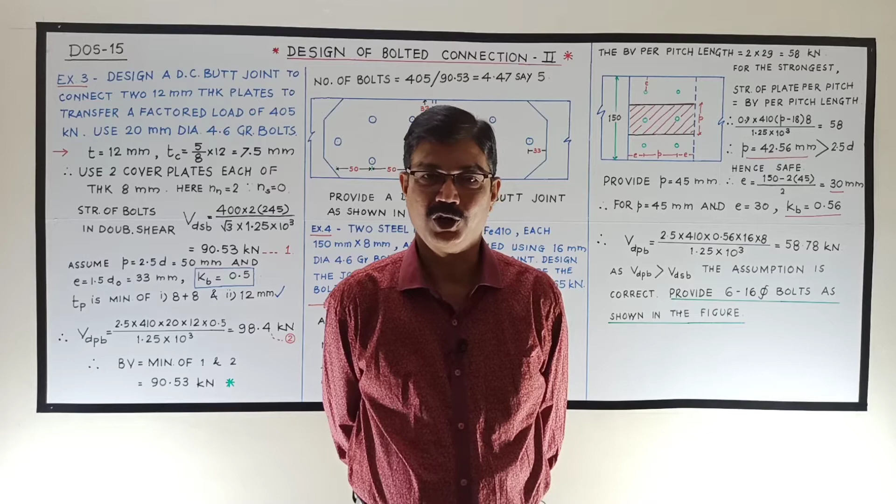Design a double cover butt joint to connect two 12 mm thick plates to transfer a factored load of 405 kilonewton. Use 20 mm diameter 4.6 grade bolts.

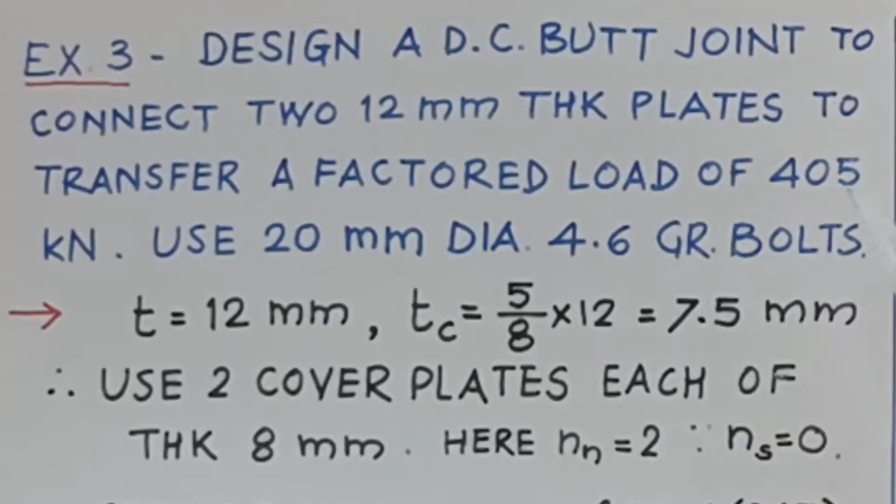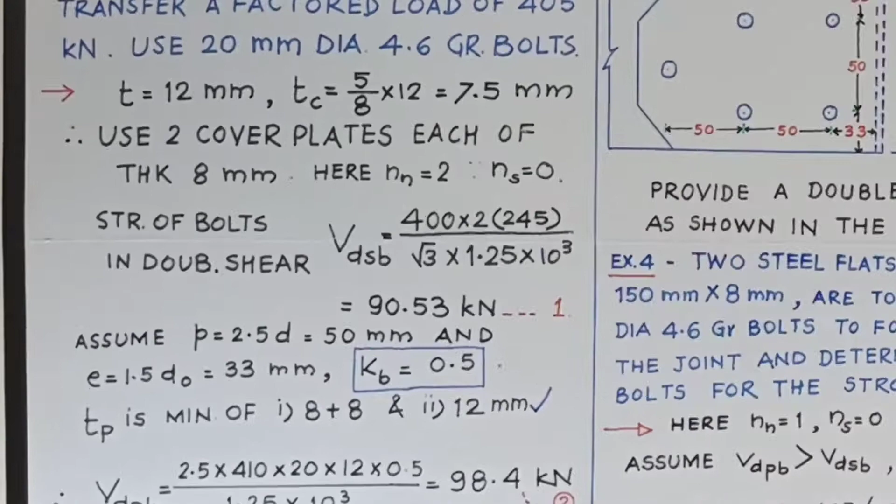Problem number 1 and 2 were of lap joint. This problem is of a double cover butt joint. What is given? The thickness of plates is given as 12 mm.

Now thickness of cover plate is not given. How is thickness of cover plate calculated? Generally, total thickness of cover plate is 1.25 times the thickness of main plate. So the thickness of one cover plate will be 0.625 times the thickness of main plate, that is 5 by 8 times 12, that is 7.5 mm.

But 7.5 mm thick plates are not available. Therefore, we will use two cover plates, each of thickness 8 mm.

Now in this case, it is a double cover butt joint, therefore the bolts will be subjected to double shear. Therefore, Nn plus Ns is equal to 2. As usual, nothing is specifically mentioned regarding the shear planes, so we will take Ns equal to 0. Therefore, Nn is equal to 2.

Now, let us calculate the strength of bolts in double shear, that is VDSB, as usual FUB upon root 3 into Nn into ANB upon gamma MB.

Let us assume that pitch is 2.5 D, D is 20, so it is 50 mm, and E is 1.5 D0. As diameter is 20, D0 is 22, so 22 into 1.5 is 33 mm.

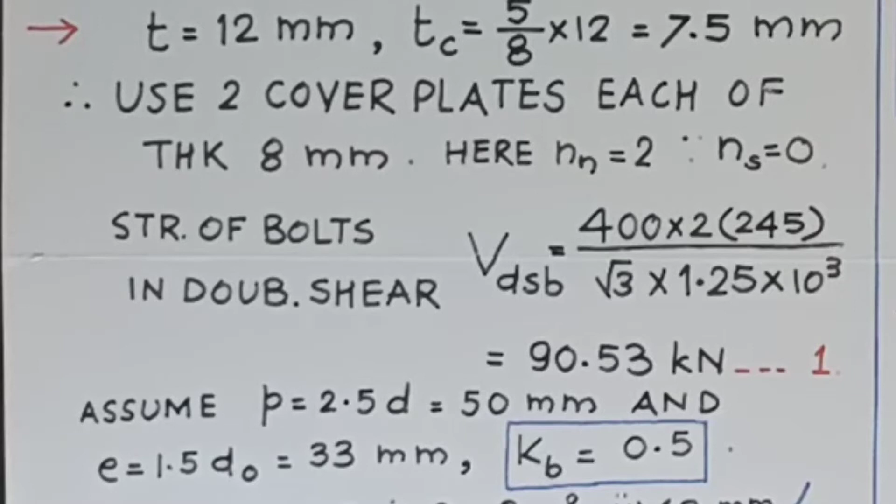As usual, calculate KB. KB is the minimum of: first, E upon 3 times D0; second, P upon 3 times D0 minus 0.25; third, FUB upon FU; and fourth, 1. Out of all those, the minimum value is 0.5, so KB is equal to 0.5.

Now for calculating VDPB, that is design bearing strength of bolt, we will require the thickness of plate, that is TP. Here two cover plates are there, their total thickness is 8 and 8, and the main plate is 12 mm. So 8 plus 8 and 12 mm, minimum of these is 12 mm. Therefore, TP will be taken as 12 mm.

VDPB is calculated as usual: 2.5 into FU into D into TP into KB upon gamma MB, into 10 raised to 3 for conversion into kilonewton. This comes out to be 98.4 kilonewton. Let us say that this is second one.

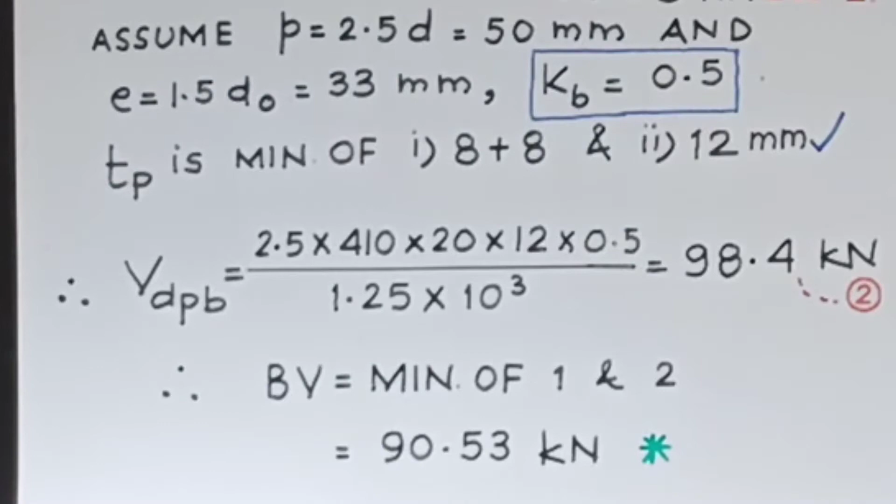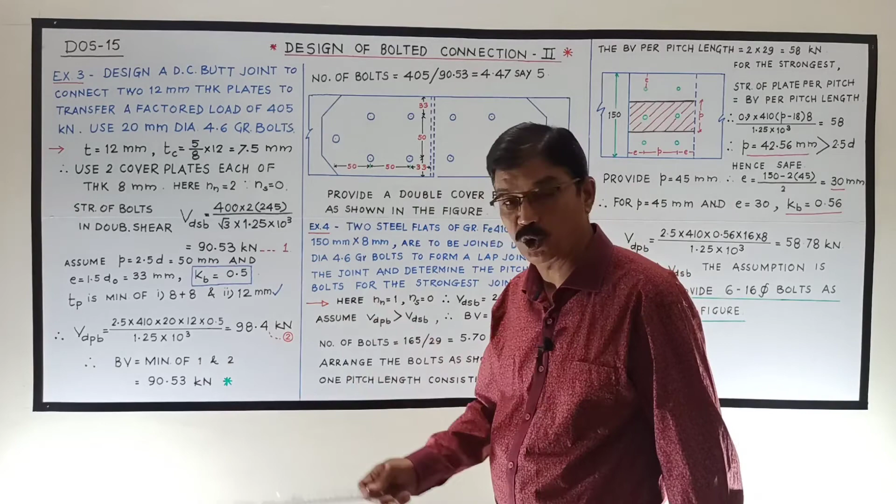Now bolt value definitely will be minimum of strength in shearing and strength in bearing. Therefore it is minimum of 1 and 2. Therefore, bolt value is 90.53 kilonewton. Do you understand this?

Now, once we calculate the bolt value, we can find out the number of bolts required. Number of bolts required is equal to factored load to be carried divided by bolt value, that is 405 upon 90.53, which comes out to be 4.47, say 5.

Now, how to provide 5 bolts? Provide a double cover butt joint as shown in the figure. So these are 5 bolts, 1, 2, 3, 4, 5th.

We have already taken value of P as 50 mm, value of E as 33 mm, and we have already assessed that bearing strength is greater than shearing strength, so there is no question of assumption. So these 5 bolts are shown like this.

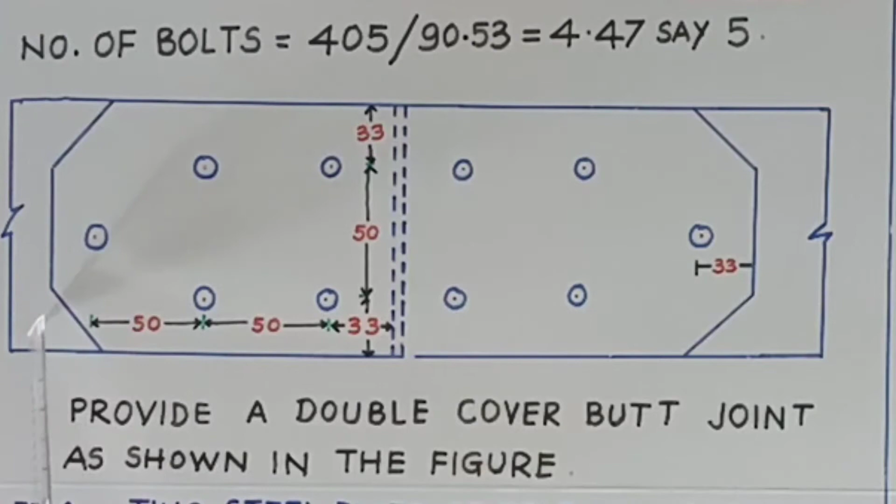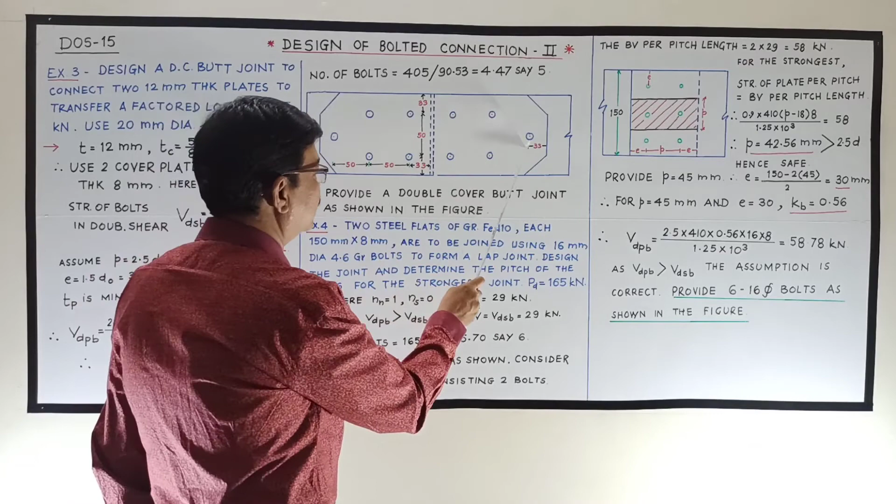This is one plate, this is another plate, this is cover plate, this is main plate, this is cover plate, main plate. This is pitch 50 mm, pitch 50 mm, this is edge distance, this is edge distance, this is end distance. So this is how it is necessary to draw the figure when you are designing a particular joint.

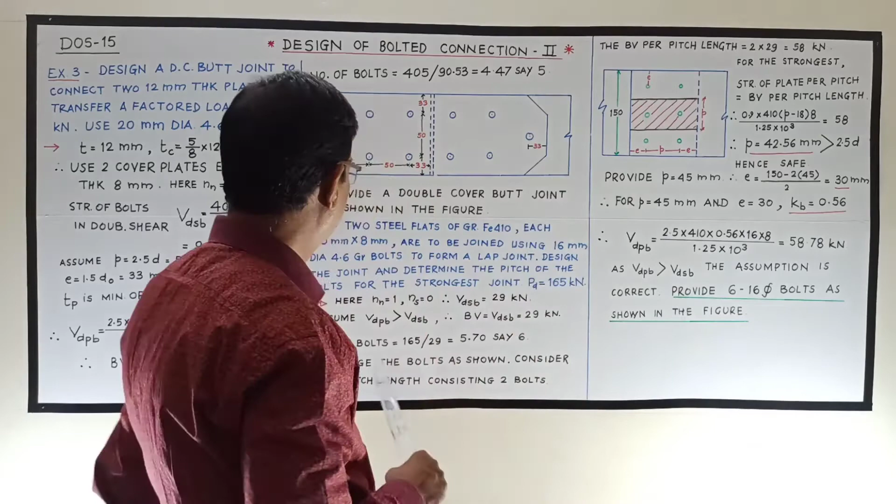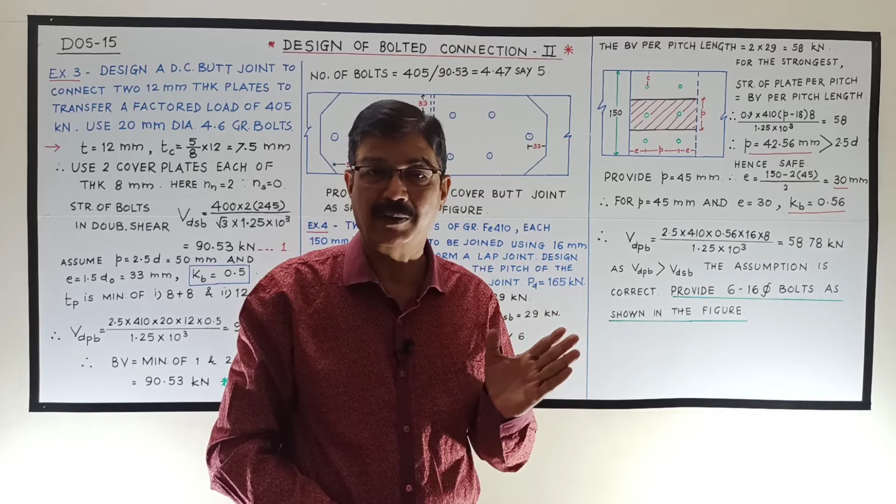So this is one problem of double cover butt joint. Let us solve one more problem of design. In this problem, we have to find out the pitch so that the strength of that joint and strength of the plate will be same, that is the joint will be strongest. So let us see how to proceed.

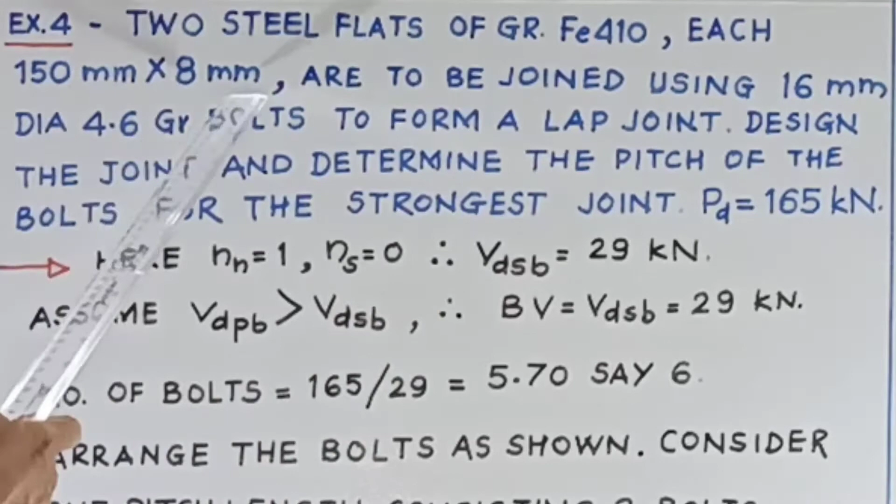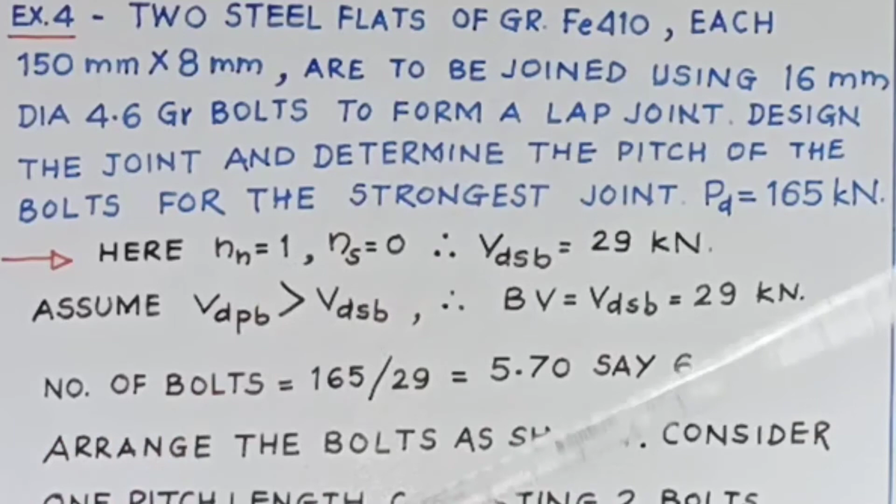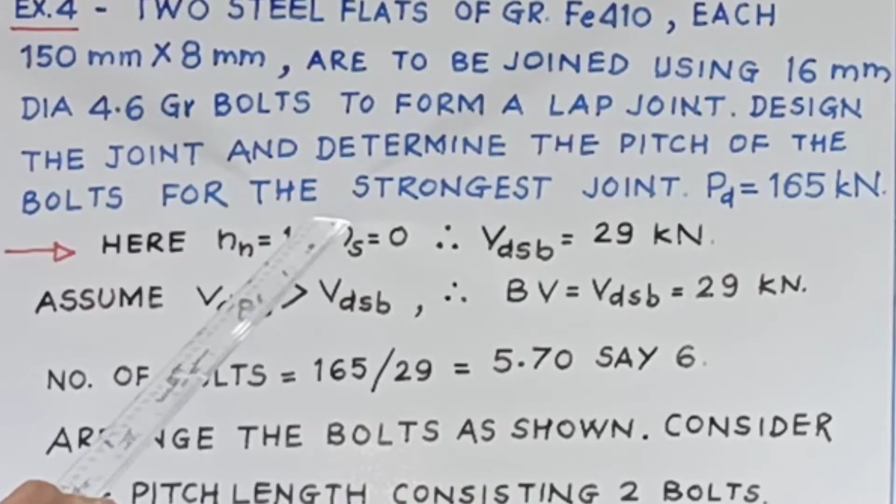So this is second example. Two steel flats of grade Fe410, each 150 mm by 8 mm, are to be joined using 16 mm diameter 4.6 grade bolts to form a lap joint. Again, this is a problem of lap joint, whereas the previous problem was of double cover butt joint. Design the joint and determine the pitch of the bolts for the strongest joint. This joint we have to design for a factored load of 165 kilonewton.

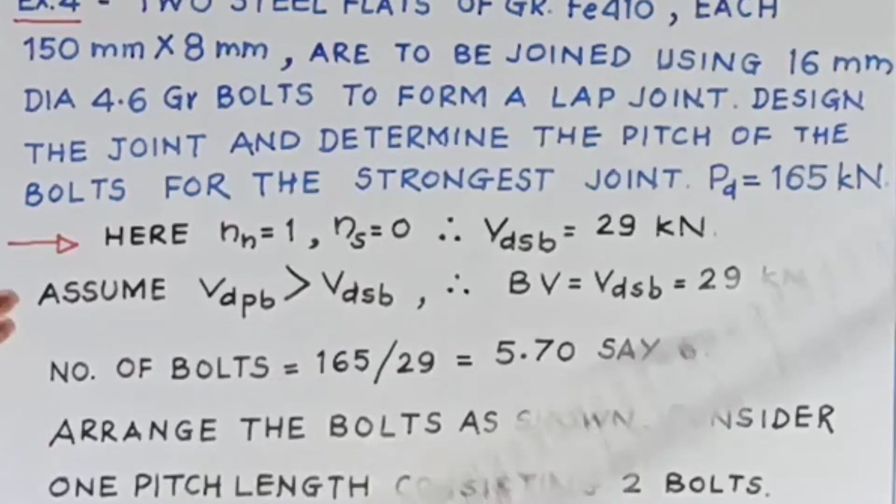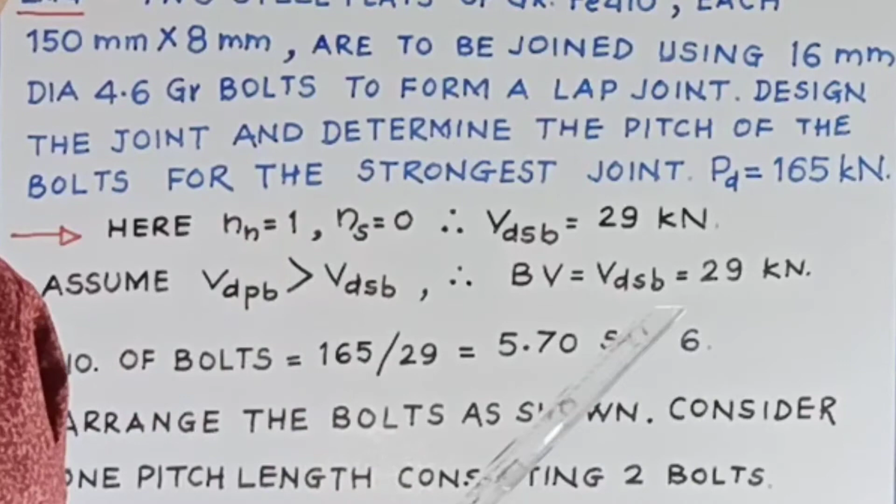Okay, now let us see what is the strongest joint and all these things. Here we have to design a lap joint. As this is a lap joint, the bolts will be in single shear. So Nn plus Ns will be equal to 1, and Nn will be 1 because Ns is equal to 0.

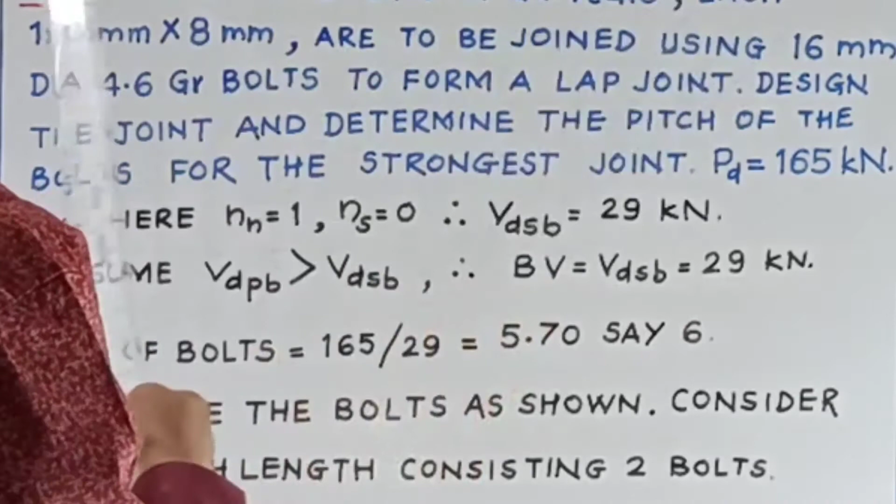Okay, as usual this is a 16 mm diameter bolt of grade 4.6. So VDSB in single shear will definitely come out as 29 kilonewton. Now how is this 29 kilonewton calculated?

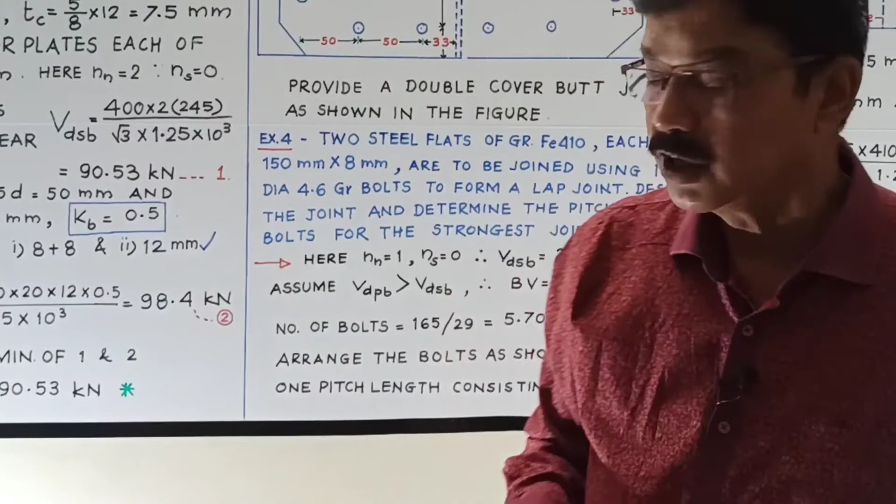Can you tell me? VDSB is equal to FUB into NN into ANB divided by root 3 into gamma MB, which comes out to be 29 kilonewton. What is the value of FUB? As it is 4.6 grade, FUB will be 400. NN will be 1. What will be ANB? As it is a bolt of diameter 16 mm, ANB will be 157 mm square. So put all these values, you get VDSB equal to 29 kilonewton.

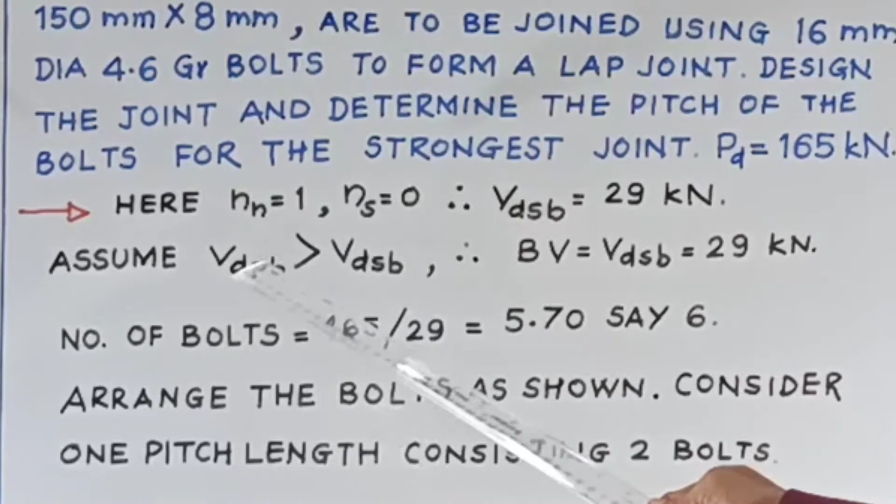Now as usual, we will assume that VDPB is greater than VDSB, that is bearing strength greater than shearing strength. Therefore, bolt value will be shearing strength, that is 29 kilonewton.

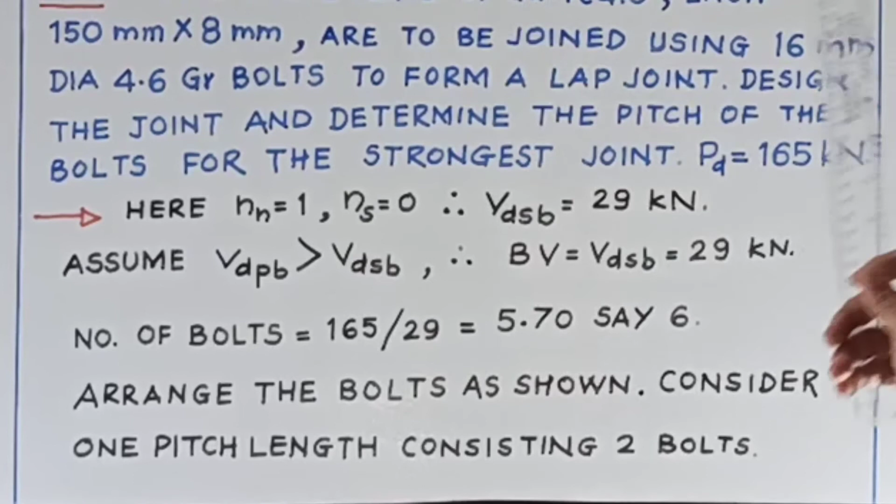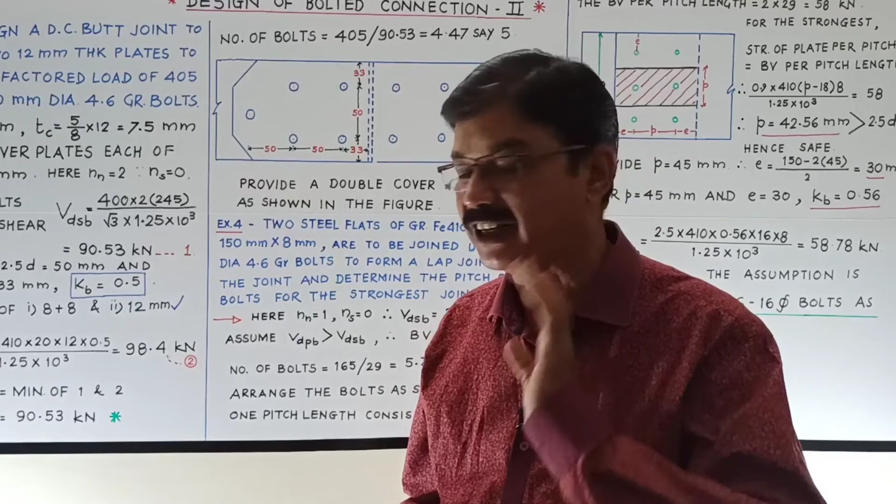Now find out the number of bolts required. Number of bolts required will be factored load to be carried divided by bolt value, that is the strength of one bolt. So 165 divided by 29 comes out as 5.7, that is 6 bolts.

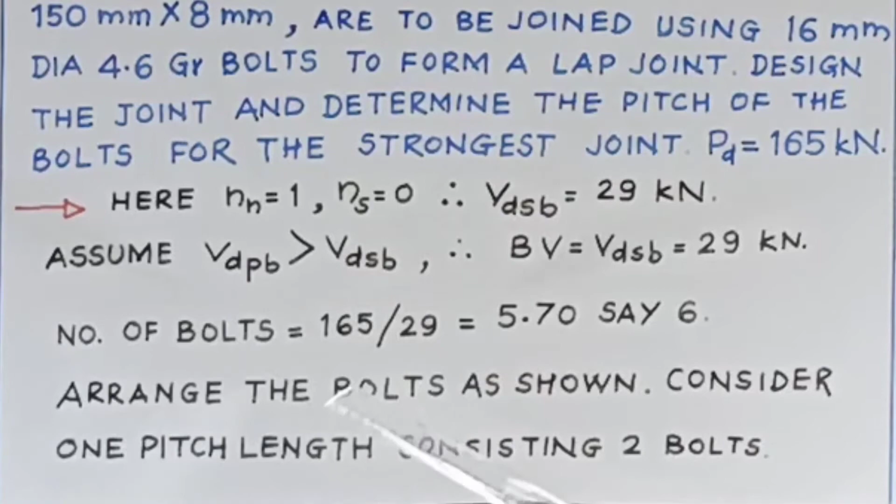So we have to provide 6 bolts. How to arrange them? Arrange the bolts as shown. Look here how the bolts are arranged. The bolts are arranged in 3 rows, 1, 2 and 3. In each row there are 2 bolts. Now this width of the plate is given as 150.

Now this is pitch, this is pitch, so half the pitch on this side, half the pitch on this side. So this is one pitch length. Because we want to find out pitch here, we cannot assume pitch is equal to 2.5D or something like that, because we want to find the pitch so that the joint will be strongest.

So in this one pitch length, 2 bolts are falling. One pitch length consists of 2 bolts. Therefore, bolt value per pitch length will be 2 into bolt value, that is 2 into 29, that is 58 kilonewton. Now let us see what we mean by the strongest joint.

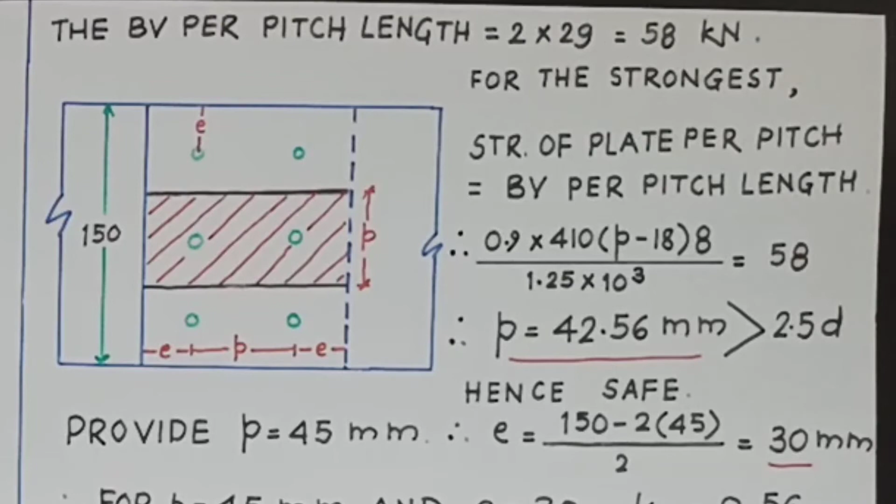For the strongest joint, strength of plate per pitch length must be equal to bolt value per pitch length. In short, the joint will be said to be strongest when the strength of the bolts and strength of the plates are equal. Here we are considering 1 pitch length, therefore these strengths are per pitch length. So strength of plate per pitch length is equal to BV per pitch length.

Now what is the strength of plate per pitch length? Only B will be replaced by P. So 0.9 into Fu into P minus D0 into T upon gamma M1 into 10 raised to 3 for converting into kilonewton must be equal to BV. Again I will repeat, whenever there is Fu it is always multiplied by 0.9, because there is no reserve strength beyond ultimate strength.

So 0.9 into Fu, P is pitch minus D0, 18 into thickness, that is 8. What thickness is taken? 8, because each plate is of thickness 8 mm. Divided by gamma M1, that is for resistance to ultimate stress, that is 1.25 into 10 raised to 3, is equal to 58. If you solve this, you will get the value of P as 42.56 mm.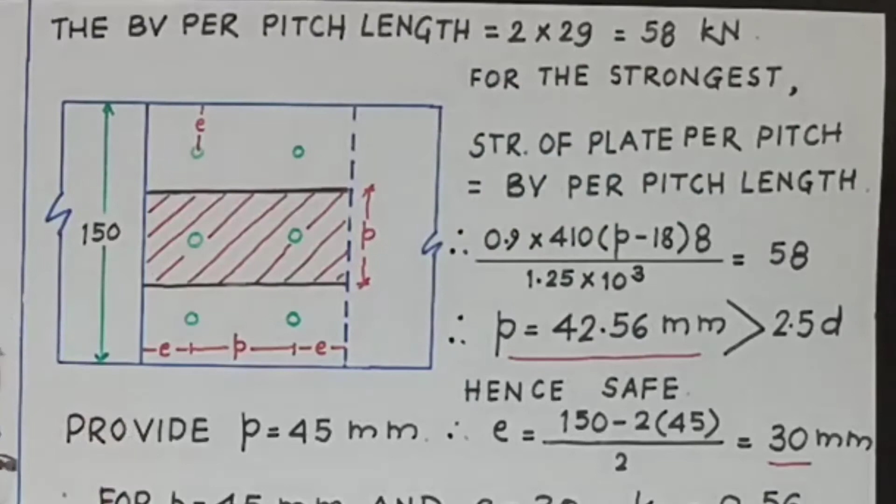What is the minimum pitch? 2.5D, D is 16, so 2.5 into 16 is 40. This is greater than 40, hence it is safe. As it is 42.56, we will provide the pitch of 45 mm.

So whenever the pitch of 42.56 is provided, the strength of the bolt and strength of the plate will be equal. So we provide round up 45 mm.

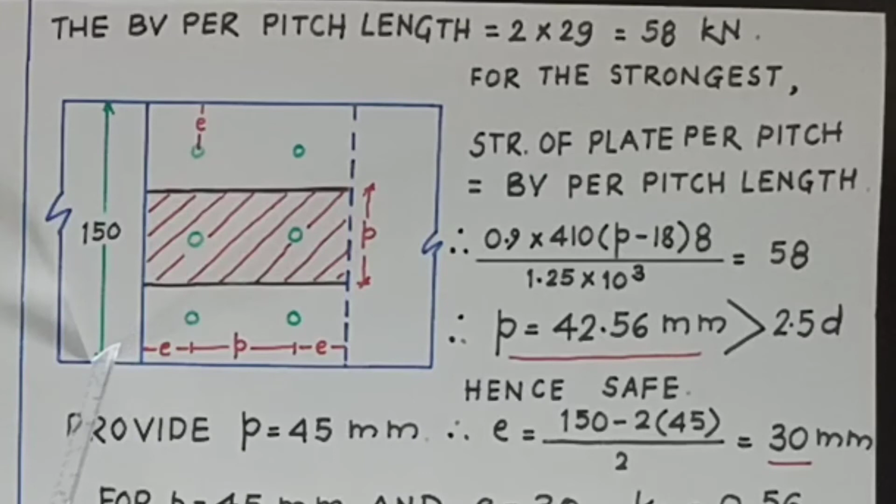When P will be 45, what will be E? This total distance is 150 minus 2 pitches, minus 2 into 45. Remaining distance is this and this, so divided by 2 is 30 mm.

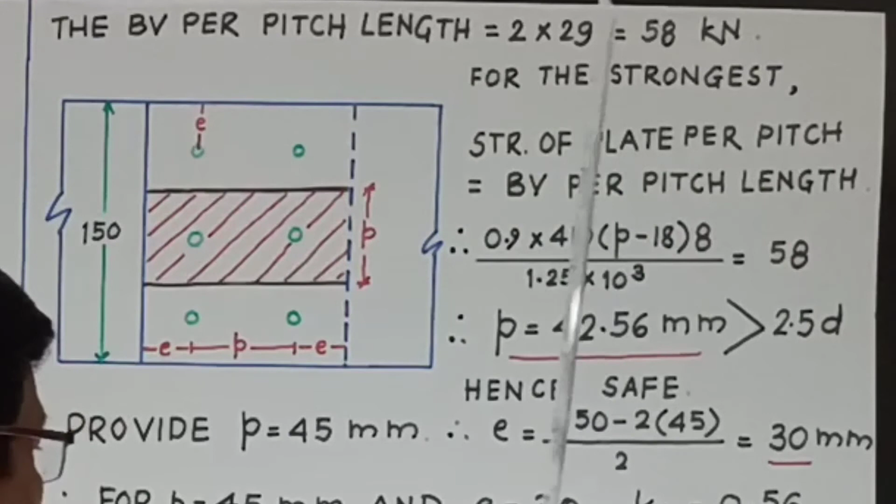Therefore, provide pitch of 45 mm and edge distance of 30 mm.

For these two distances, if you find out as usual, KB will be 0.56. How do we find out KB? KB is minimum of E upon 3D0; second, P upon 3D0 minus 0.25; third, FUB upon FU; and fourth is 1. So minimum of this is 0.56.

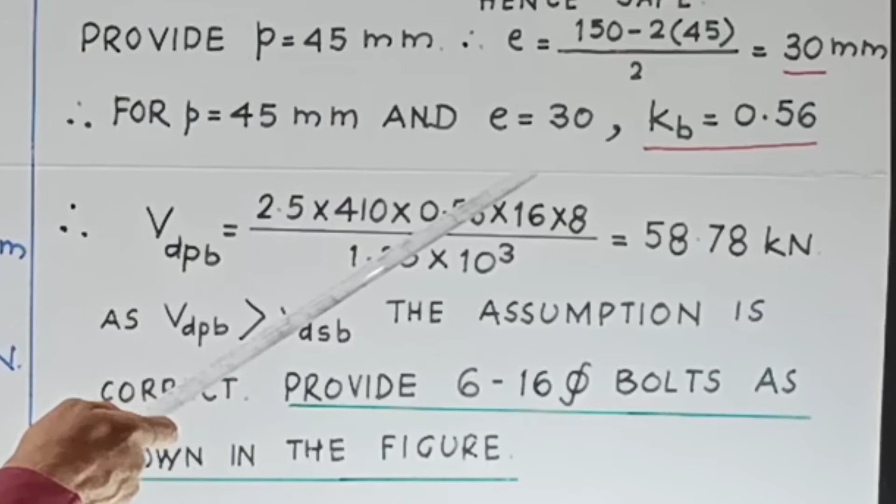Again find out VDPB. VDPB is equal to 2.5 into FU into KB into D into TP divided by gamma MB into 10 raised to 3 for converting into Newton. So if you substitute all these values, it will come out as 58.78. Now you can very easily see that VDPB is 58.78, VDSB is 29.

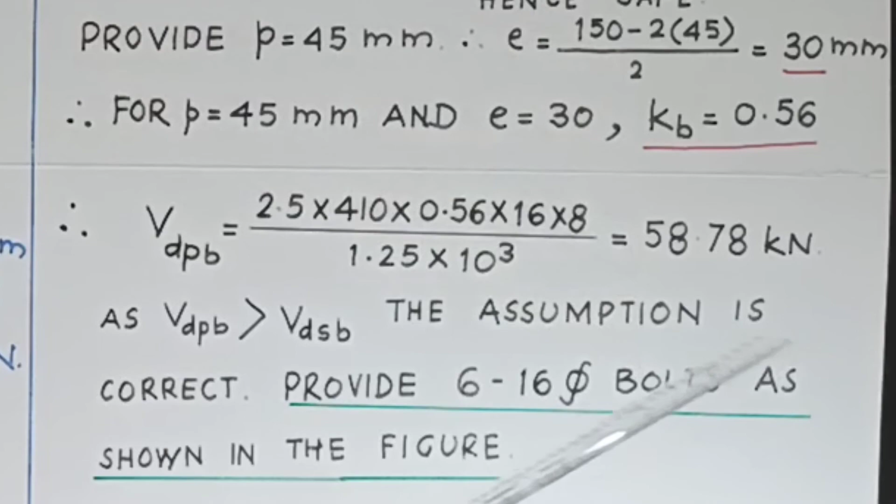As VDPB is greater than VDSB, the assumption is correct. Therefore, provide 6 numbers, 16 mm bolts of grade 4.6 as shown in the figure.

So this is also one of the problems which is generally asked in the examination. Therefore, with this, we have solved 4 problems of design. We have already solved the problems on strength and efficiency, the problems to find out shearing strength, problems to find out bearing strength, problems to find out strength of plate in tension.

So with this, we finish bolted connections. In the next video, we will start with welded connection.